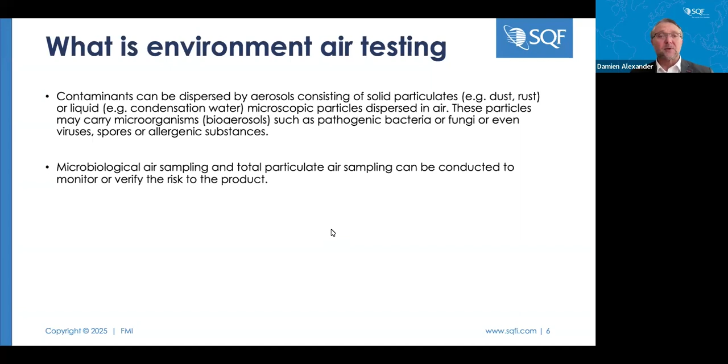Environmental air testing can incorporate allergens, but for the sake of this webinar, this presentation today, we're going to be focusing on micro, chemical and physical, so micro pathogens and likewise spoilage microorganisms, physical such as rust, particulates, and chemicals which could be oils or contaminants from compressors, as an example, that could get onto food. We're not going to touch on allergens as part of this testing methodology, but we're going to certainly focus on all of the others.

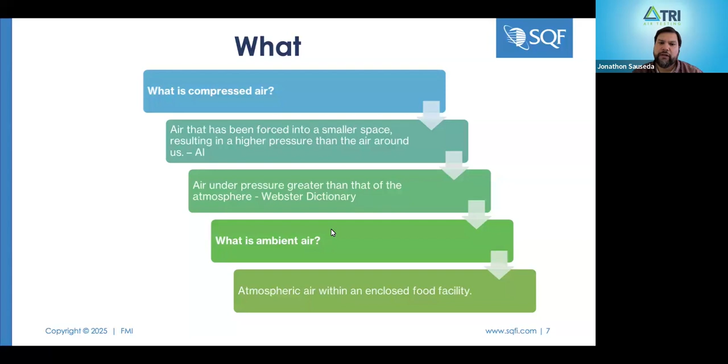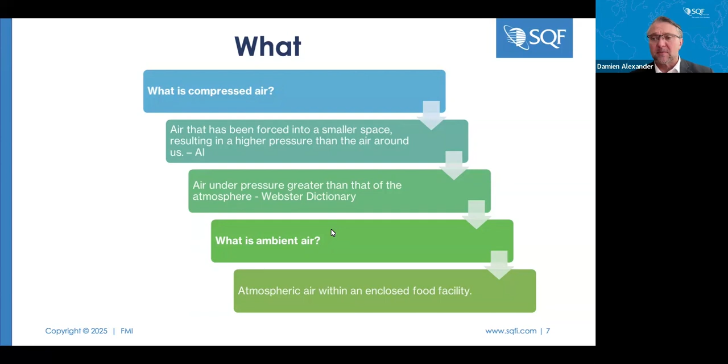I see it in the coffee industry, the dairy industry. So everyone's using it. And as far as instrumentation as well, they're using it for some of these instruments to be able to function and operate these different machines. Sure. So even in high risk environments where you've got positive air pressure as well, and sorting machines where they're using compressed air to blow off different types of products. So across the food industry, compressed air is obviously commonly used. So great, thank you.

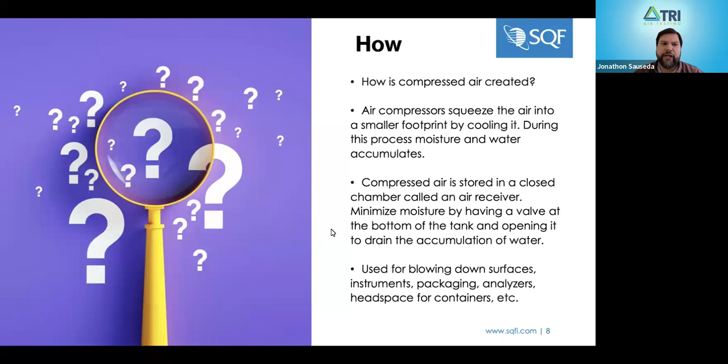And then how's compressed air created? So what happens is the compressor takes the ambient air around us, confines it, and brings it into a small tank. We're going to see some examples in a little bit, but during this process, while it's being compressed, you have different things happening to that air. That ambient air, while it's being compressed, is becoming very hot, and that will create some condensation in the compressed air.

You'll have particulate accumulating. Although we can't see it, normally you can see about a 50 micron size particle, and we're talking about 0.1 micron all the way up to 40, 50 micron. So you don't see the particulate, but particulate's being condensed as well, so you're introducing particulate in the compressed air at this time. And then, like we discussed, it's used for surfaces, packaging, analyzers, and head spaces in the different containers and packaging processes.

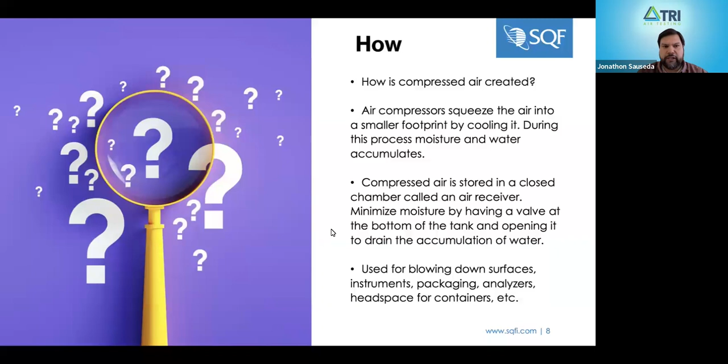Doesn't rust the inside of those compressed air tanks, which will cause more damage to your lines down the road. Rust and dirt, particulate. And so by using that valve and having your maintenance crew open and close that valve, or having some sort of automatic system on that valve to open and close it during processing, you can really cut down on some of this. Particularly if you have lines that are older lines, galvanized or cast iron. Stainless steel, copper, not such a big deal, but if you start introducing moisture, or you have moisture in galvanized piping or cast iron piping, you're going to create a lot of problems.

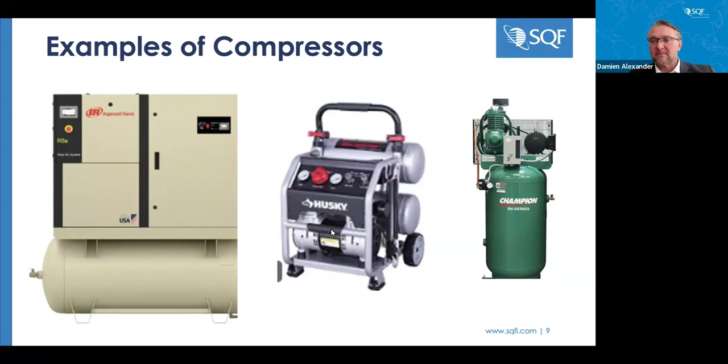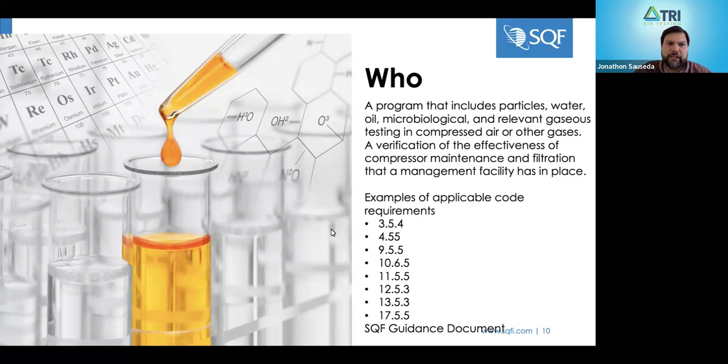And then who needs to test, or who needs to follow these guidances for particulate, water, oil, microbial, and even your gas testing? As Damien mentioned earlier, SQF has those guidances, and in those guidances are different documents, and these are a few. And you'll see in the next couple of slides where it specifically tells you what you need to test, how often you need to test it based on the guide that you are following for your programs, whether it's animal feed, primary plant production, food packaging, storage and distribution.

This is where in the code it tells you what you need to test and how often you need to test it, and gives you some guidance. So if you're looking to know what you need to test, or if you're even qualified to test, or if you need to test, this is where it tells you in the SQF guidance or the SQF documents. Yeah, so these are the requirements straight out of the code, absolutely.

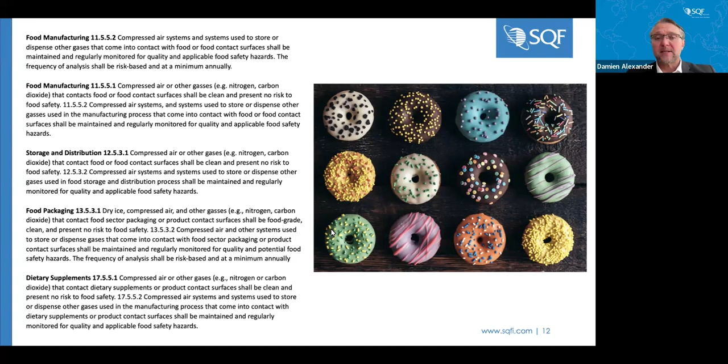And then, as you've mentioned quite rightly, those guidance documents provide some additional guidance. The guidance documents are not auditable. These are the auditable requirements. But it's really coming down to knowing and controlling your potential hazards and your risks.

Definitely. And then how often do you need to test? Honestly, what SQF says is at a minimum annually. However, that doesn't apply for everyone. And that's because first of all, you need to get a good baseline to figure out what specification you need to test. Not everyone in the food industry tests the same particulate, water, total oil specification.

And we're going to go through the guidance in a minute on how I can figure out what I test, where I need to test, what I can use for guidance, which is ISO 8573, good guidance for the particulate, the water, and the oil. But you need to do a good validation, first of all, to determine a specification if you haven't done that. Some places already have specifications based on baselines or internal conversations of their risk. But at the beginning, you got to set up a validation testing, and we're going to talk about that in a minute.

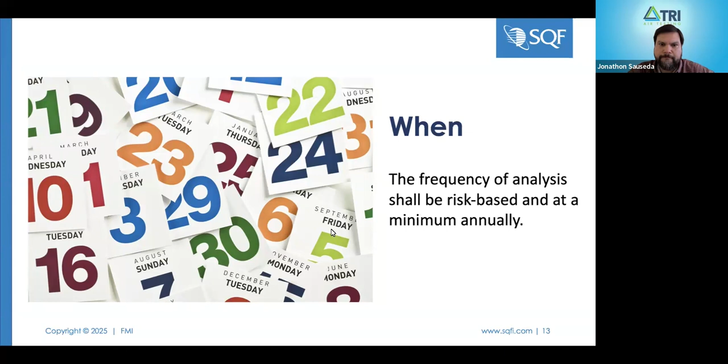And then where do I test? Where am I testing my ambient air, locations? And so this also is very good to know where I need to test. Obviously, you want to test at your point of use where the air is coming out, because that's where it's actually hitting the product, the line, the packaging, the capper, all that good stuff. But you also want to test it upline.

If you have 20 points of use, and it's compressor, and then your filtration, maybe a 5 micron or 1 micron or 0.1 micron filter there, you want to test after that original filtration before it goes downline to see if those filters are even working. And then you want to test down at the points of use, because that's where it's coming out, and that's what's touching your product. What I've recommended and what I've seen with a lot of customers out there is they do the validation testing.

So let's say you have 20 points of use. You're going to test right after your original filtration, your filter, and then you're going to test a couple spots in between, and then you want to test at that furthest point that the compressed air is reaching. That way you can validate, hey, we're getting consistent air all across, from the closest line to the filter, to the lines in the middle, all the way to that last furthest point from the filter, and get a nice good validation on results, making sure they're all consistent.

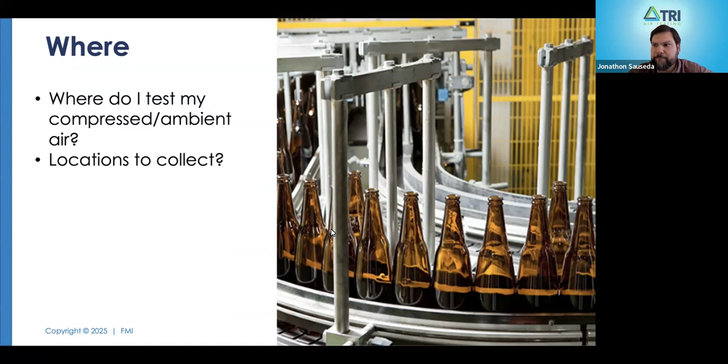Excellent. And then this is the guidance that I see a lot in the food industry. Even the pharmaceutical industry uses this to determine where they're at. And I'm going to break this down. If you can see the colors, the particulates are the green, the water's the blue, and the oil is the orange. These are the three that SQF says to test, along with mold and bacteria in high risk.

So let's just break down the particulate first. If you look on the left-hand side of this chart, those are the different classes. They go all the way from class 0 to X. I haven't seen anyone in the food industry do a class 0, and all class 0 says is that it exceeds, and it's more stringent than class 1. But let's look at class 1 through 5. If you look above there, you're going to see 0.1 to 0.5, 0.5 to 1, and 1 to 5 micron.

So what you're doing with a class 1 through 5 is you're actually counting the micron sizes of particles, and then you're quantifying them. So you're saying, hey, I have 0.1 to 0.5 micron, and I have less than 20,000 if you want to hit class 1 for that. And then when you look at class 6 for particulate, now we're testing your particulate, but we're doing it gravimetrically, which means we're weighing the amount of particulate before and after the sampling. We're telling you we have this much weight, but we're not telling you what size it is.

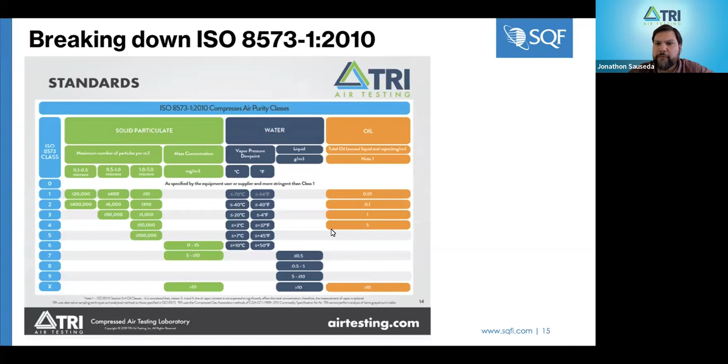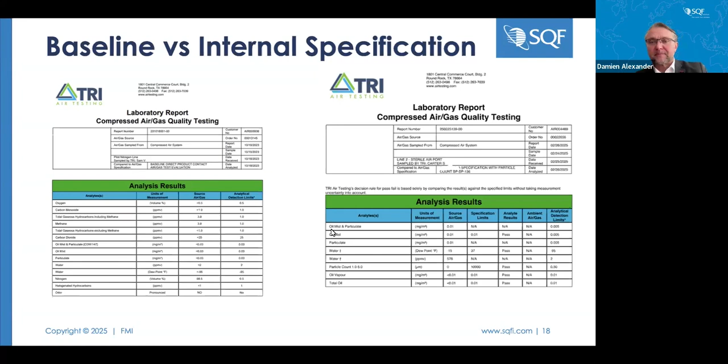I've seen it. I've seen the moisture where it happens, where companies have two compressors, and so maybe one day they use A, then B. Well, then for some reason they just stay on the same compressor and they get off track on switching back and forth, and then they weren't using that valve that we had talked about earlier about draining the moisture. So the day that they pulled the sample, they were testing the other compressor,

which I would say you always want to test both compressors, or both compressors at the same points of use to make sure it's consistent air. But they didn't change out the valve. The water had been sitting there for 6 months in these tanks, because they were just using the other compressor, and they had major problems down line. So yeah, definitely want to test them.

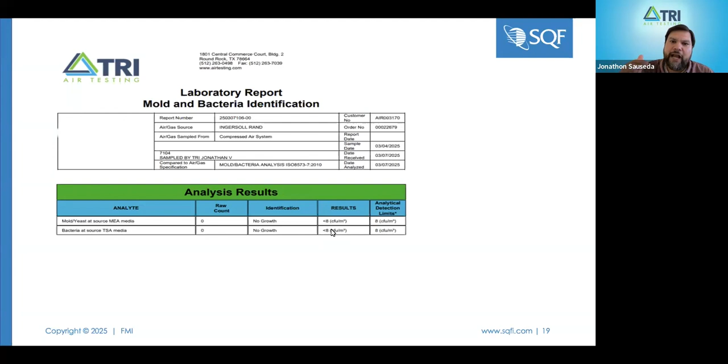And then this is what a mold and bacteria report looks like. It'll tell you what you're testing: bacteria, mold, or yeast. But then it's going to give you some raw counts, identifying it, and then the results in colony forming units. It's one thing to do ambient air on a settling plate, but when we're talking about compressed air mold and bacteria testing, you really want to find equipment that's tested in line. And what I mean by in line is the equipment hooks up to the compressed air line, and there's no air coming out of your points of use onto a plate.

What I've seen a lot on the compressed air is they'll blow the air out of your point of use. They'll put a plate over here, blow the air onto a settling plate, and then they either have positive or negative on that plate. The problem you have there is you have ambient air in between where the air comes out and where it's hitting your plate. So if you have a positive, you don't know if it's from the ambient air in between or it's actually coming from your compressed air. And so you get a lot of false positives and false negatives that way. So you want to find equipment that hooks up in line to your compressed air.

That way you don't have any of that fake positive or fake negatives, or you're just spinning your head on why this is happening and having to spend a lot of time when it's really not, because it's the air in between. Most facilities in the food industry, you don't have sterile air. I mean, we all have particulate. The air we're breathing right now, there's particulate in the air. There's bacteria in the air. So if you're doing something like that, you're probably going to get a positive, and it might not be from your compressed air.

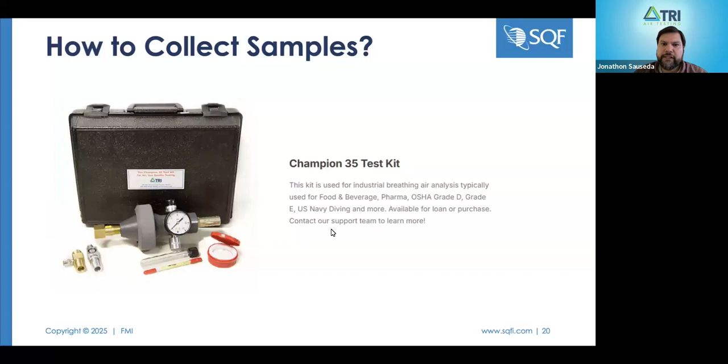We have orifice plates, so that helps, depending on your compressed air, to determine the amount of air that needs to be flown across the filter for particulate, the water, or the bottle for your gases. So this would connect up directly to your compressor to make sure, as you said before, you're not getting that environmental air. It's just what's in the line. That's correct. It'll connect right into your compressor, the lines, and then the points of use.

I want to touch on, Jonathon, if you don't mind, maintenance. And we did speak about this earlier, but prevention's better than cure. And again, the SQF does cover off repairs and maintenance and preventative maintenance and so forth. But for me, it's really interesting, some of the points you make around knowing your equipment, your validation, setting it up to make sure you've got those cutoff points, what's good, and then what it needs to be going forward. But really tying in with the maintenance program for the setup of the equipment, purchasing the equipment, the right filtration, and then changing filters.

I think that knowing and being armed with some of this information, either working in industry or as a consultant or as an auditor, the regulator, knowing some of these things can have a big impact on product safety and quality, really important. So I guess my point is, I cannot stress enough the importance of making sure you're tying in the maintenance program to help prevent some of these things from happening as well. Anything you wanted to add on maintenance, mate?

No, I think the biggest thing on the maintenance side of things, and I know we're almost done, is just making sure you're using validated methods and laboratories that are accredited, and using calibrated equipment. What I've seen, especially out here in Australia and New Zealand, is there's a lot of testing being done with tubes, which there's nothing wrong with using tubes, but they're not as accurate as some of the equipment being used in laboratories. The plus or minus on moisture tubes, specifically for gases, is very off. Whereas you can use equipment like GC mass specs, GC FIDs, and PDHIDs. That's going to get you a very precise, very accurate result. And those are mostly found at accredited laboratories.

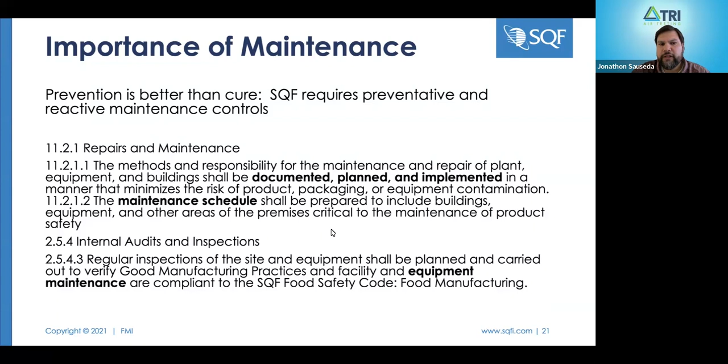So make sure that, however you're testing it, those are validated methods, and you're using accredited laboratories, because when you use an accredited laboratory, they're ISO 17025, they're ILAC laboratories, and they have validated methods, but they also have calibrated equipment and trained personnel. So you're getting good results and consistent results. So that's the only thing I would say whenever you're doing repair and maintenance and you're doing this testing.